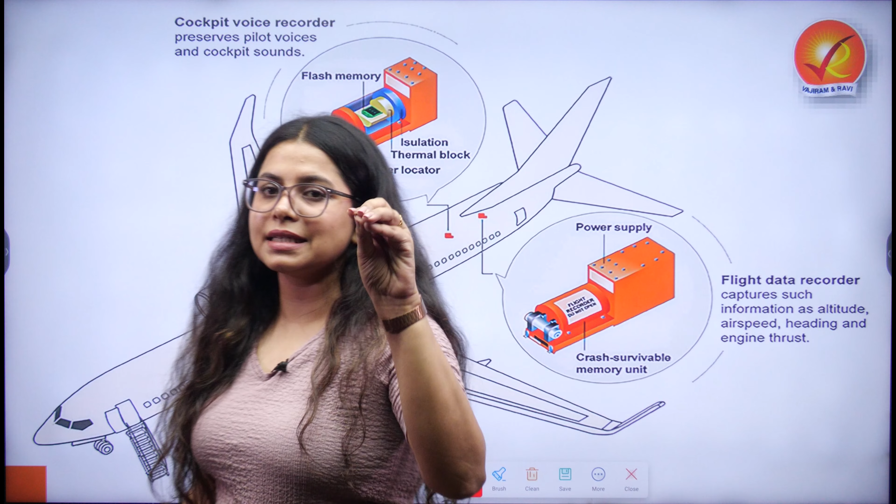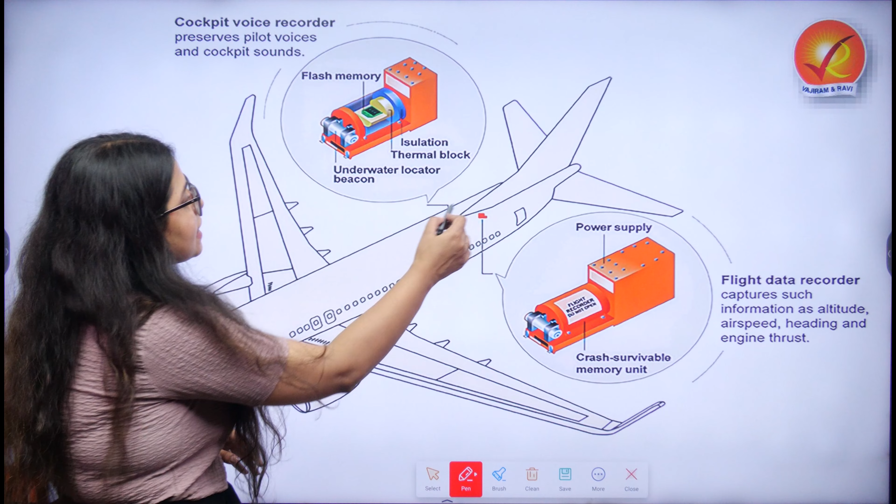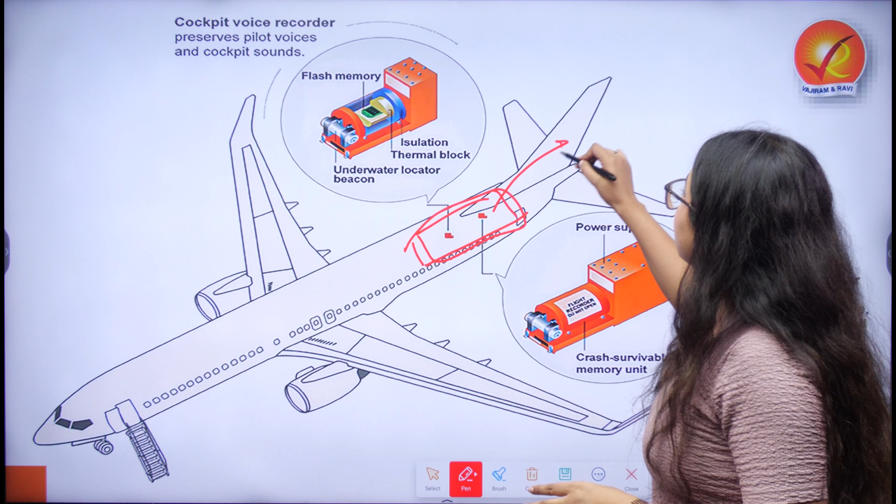Now that we have established the timeline, let us understand what exactly this black box is. Don't go by the name - the black box is rather orange in color, and it is placed in the tail of the airplane. Why? Because as per research and studies, this is where the minimum possibility of damage is seen. This is the place where it is kept.

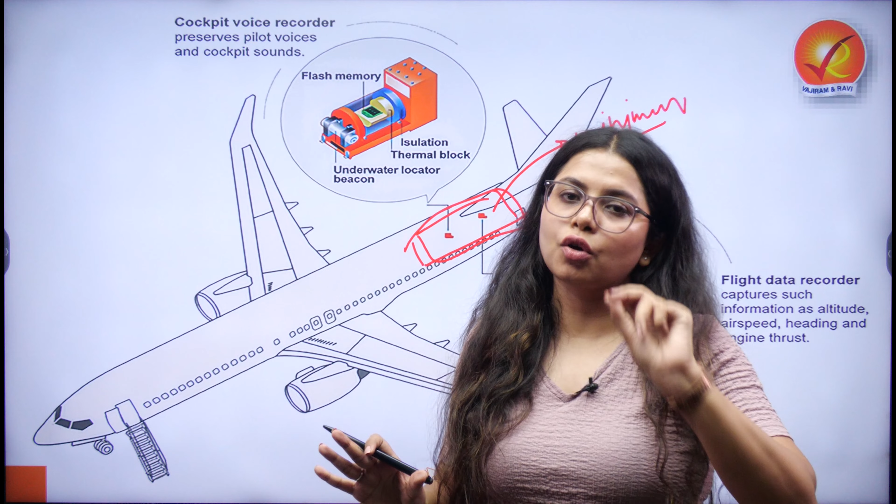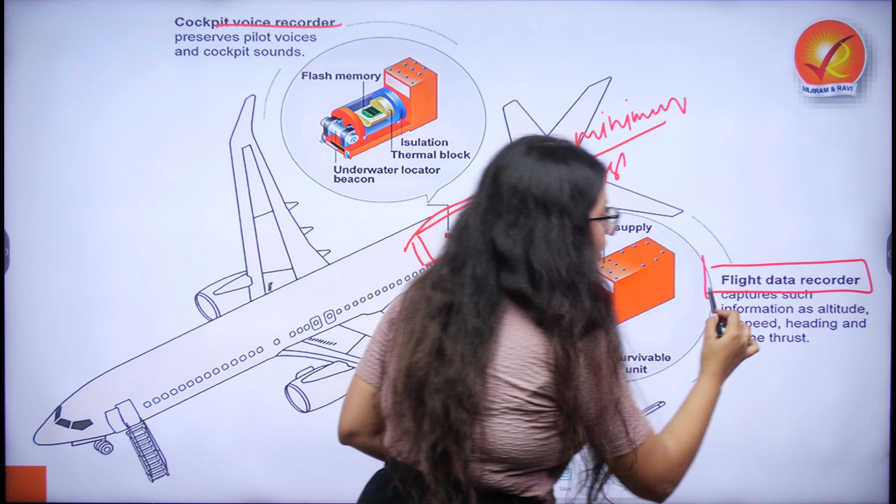Now the black box has two major components. The first component is the cockpit voice recorder. The other component we have is the flight data recorder. We'll move into more details to understand the exact purpose of both of these components.

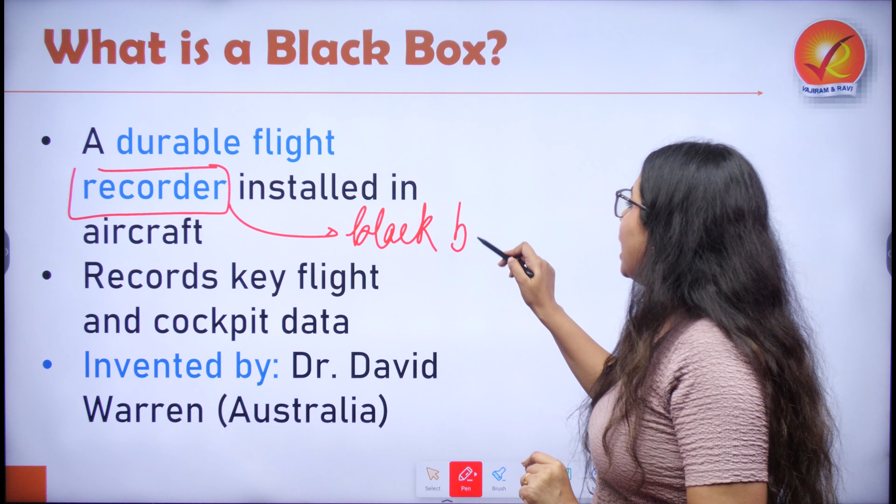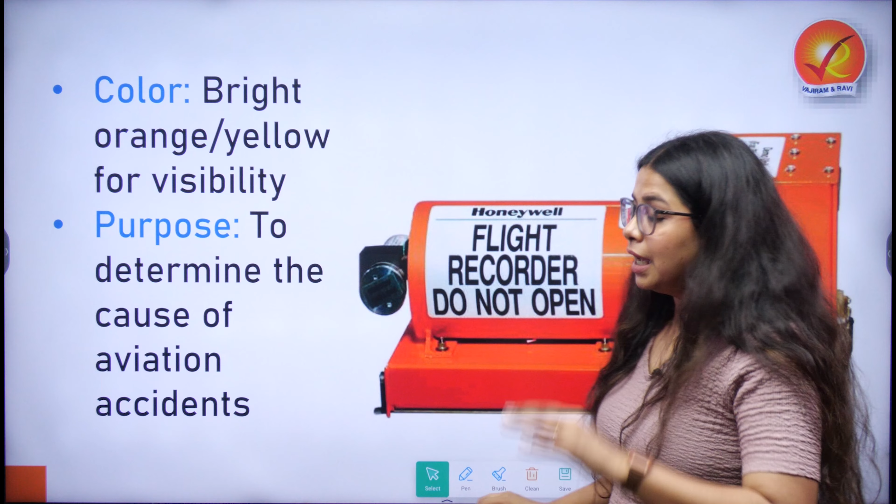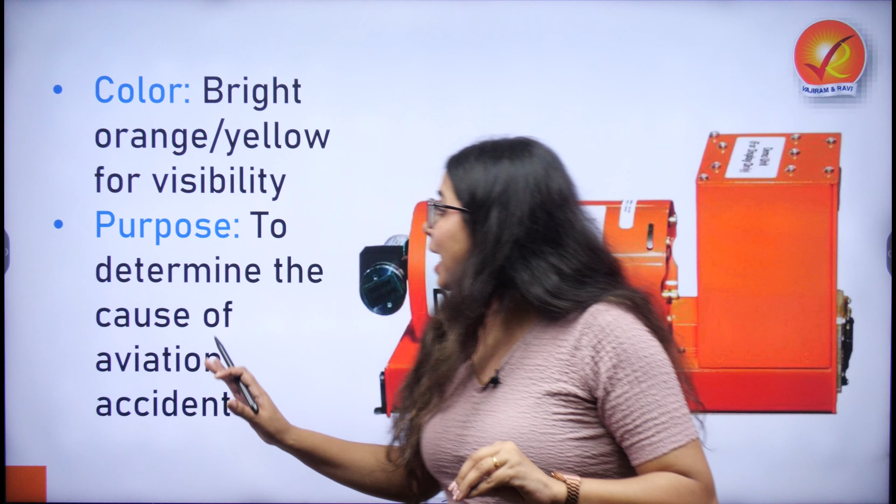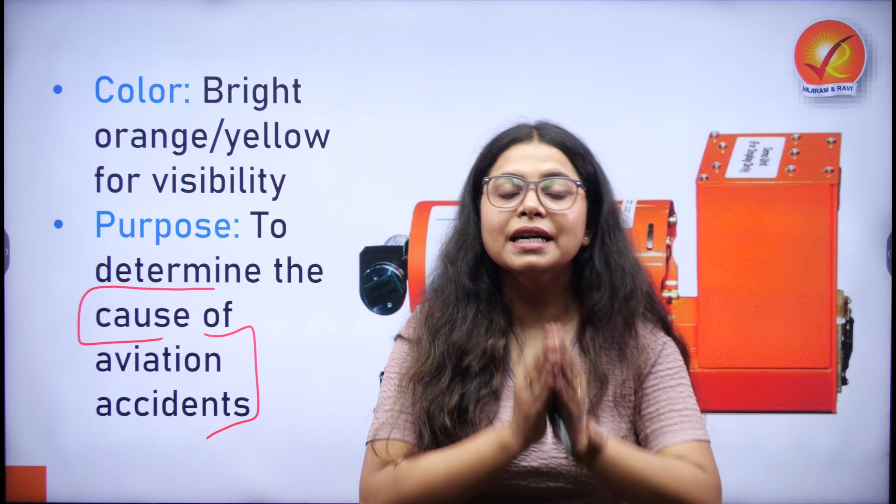But let us try to understand what exactly a black box is. Whenever we talk about a flight, a recorder is placed in that flight - that recorder is the black box we are referring to, and this recorder records all key flight and cockpit related data. It was invented by Dr. David Warren, and as mentioned before, it has two major components. Again, do not go by the name - the color of the black box is not black, it is rather orange. The purpose is only to understand the cause of aviation accidents, and it has been significant in understanding the reasons behind major air crashes or air accidents that have taken place. We'll look into a few examples by the end of this session.

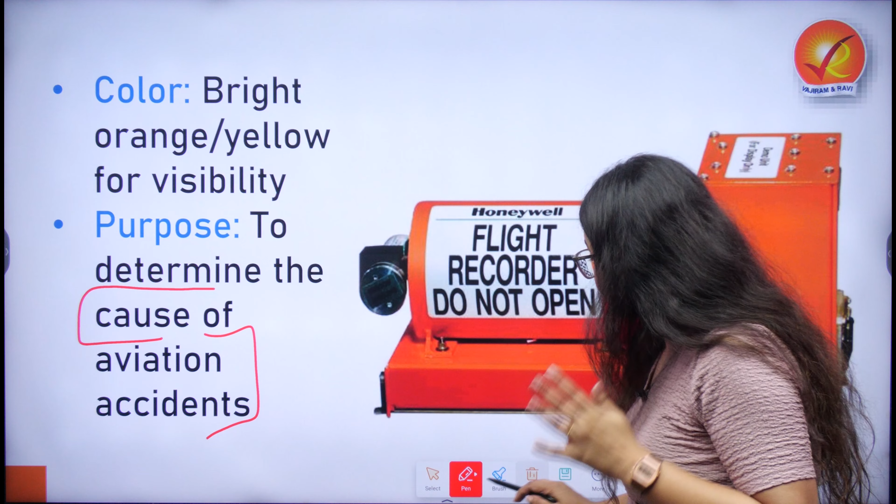Now that we have understood what a black box is - it is nothing but a recorder - what are its two components? The first component is the cockpit voice recorder, or CVR. It ensures there is a proper recording of data related to pilot conversations that have taken place, any alarms that have gone off during the flight, and the associated background sounds. The second part is for understanding flight data, which is the flight data recorder, also known as FDR.

It records all the data associated with altitude, airspeed, heading, acceleration, pitch and roll angles. So when we are trying to understand what exactly led to the crash or the accident, these two components become very important because they have all the data saved about what conversations happened between the pilots or what actually went wrong in the flight.

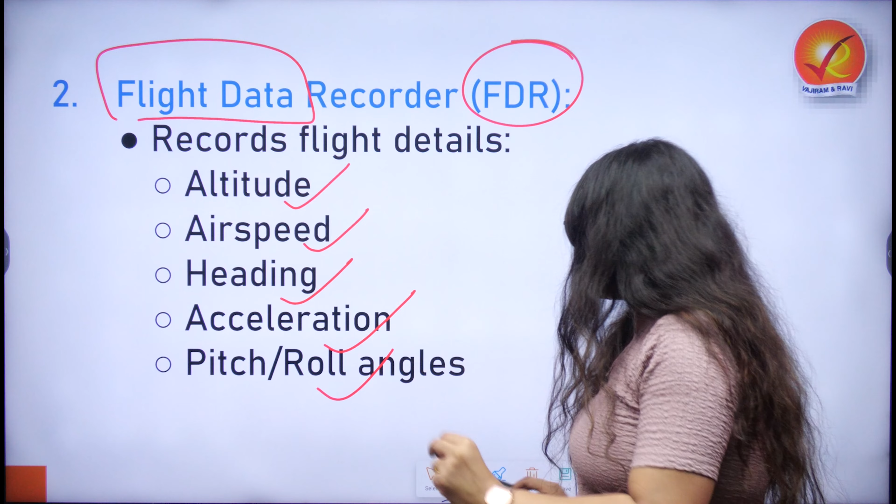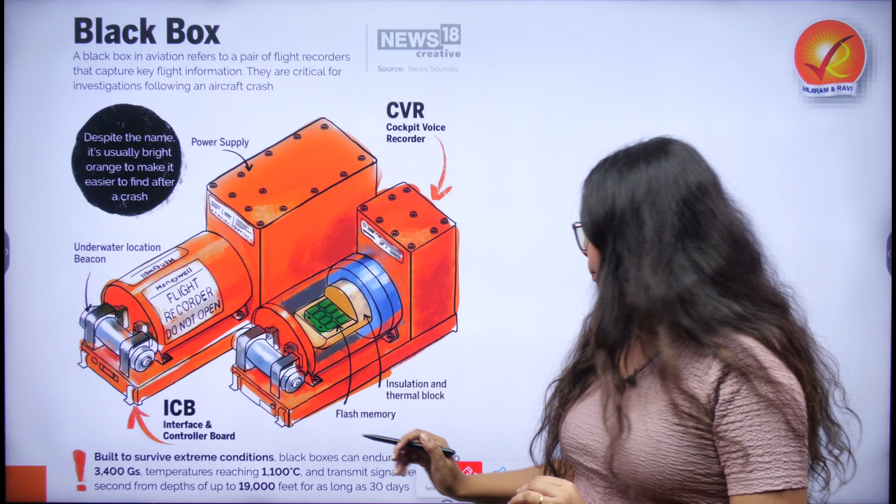Now you must have a question in your mind, even if this data exists, how it must have survived the crash. Black boxes are made such that they are able to survive such extreme conditions. So if we talk about both of these components, they are built to survive extreme conditions. What are such conditions? Let us look at these conditions.

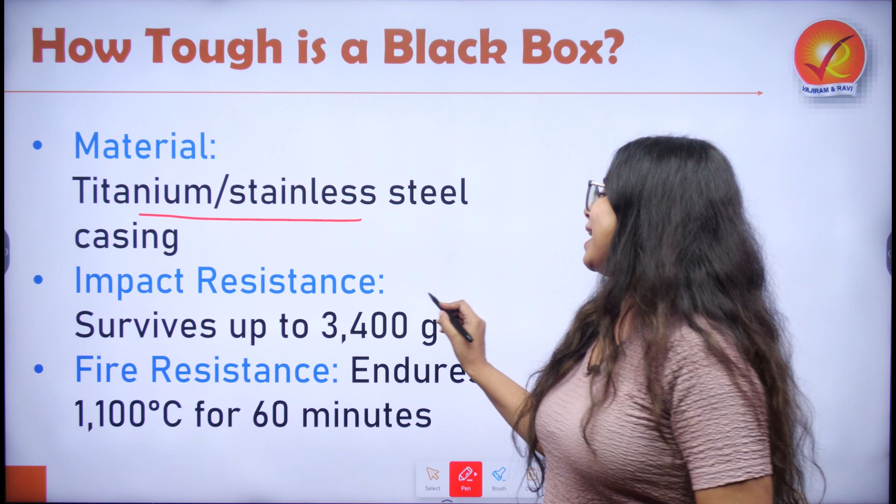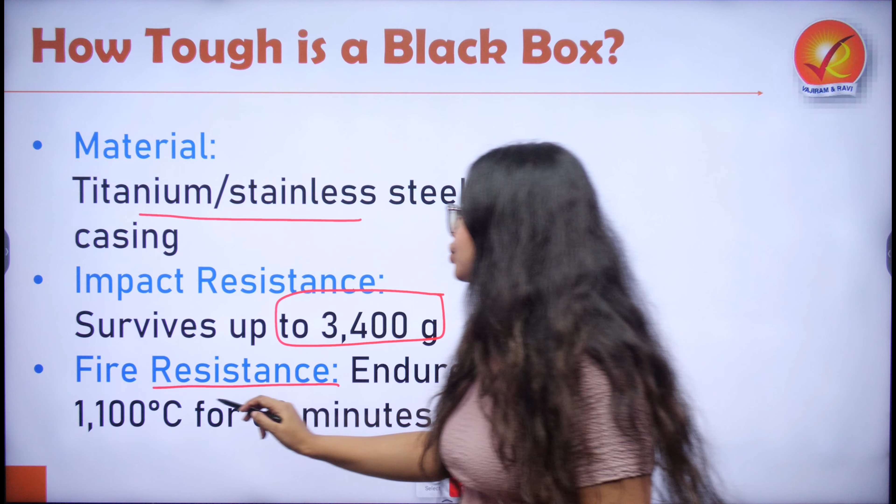The material is usually made of titanium and stainless steel casing so as to ensure they are able to survive impact resistance of up to 3400. Other than that, the fire resistance is usually 1100 degrees Celsius, that too up to 60 minutes.

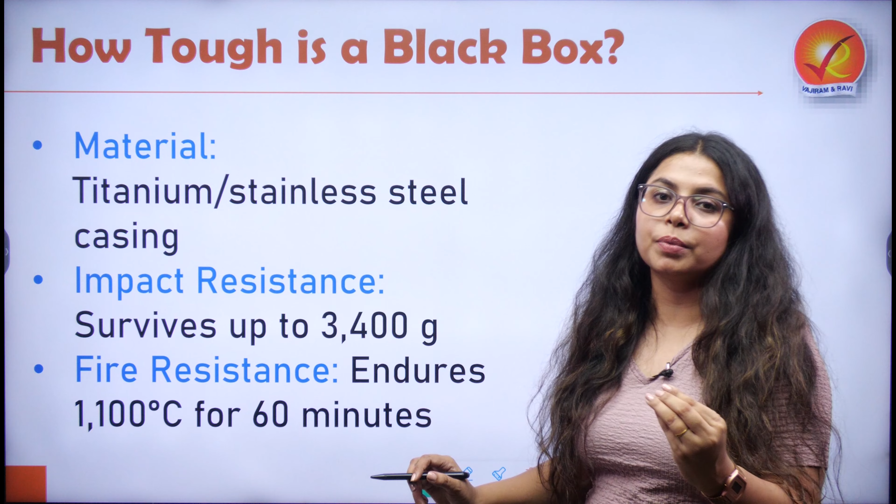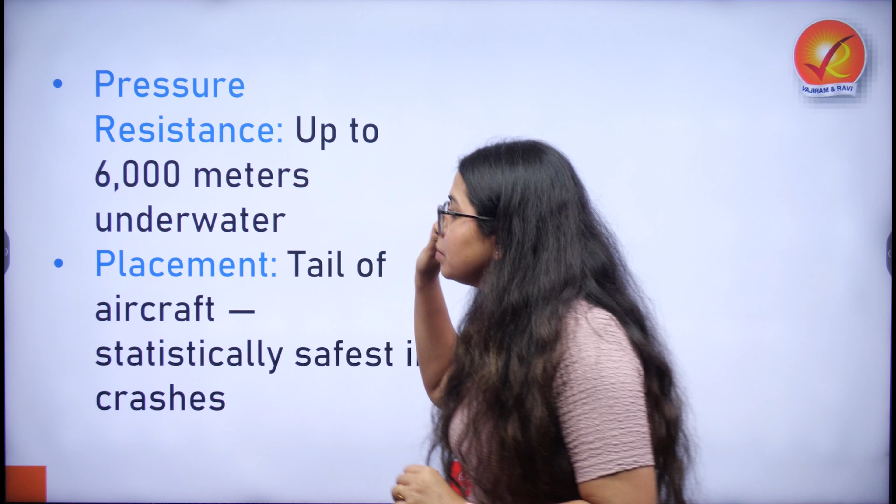So the casing is done to ensure the data present in the black box is preserved so that it serves its purpose of helping to understand the reason, the cause of the air accident. There is also pressure resistance of 6,000 meters. Even if the airplane crashes into a water body, it can resist up to 6,000 meters underwater of pressure.

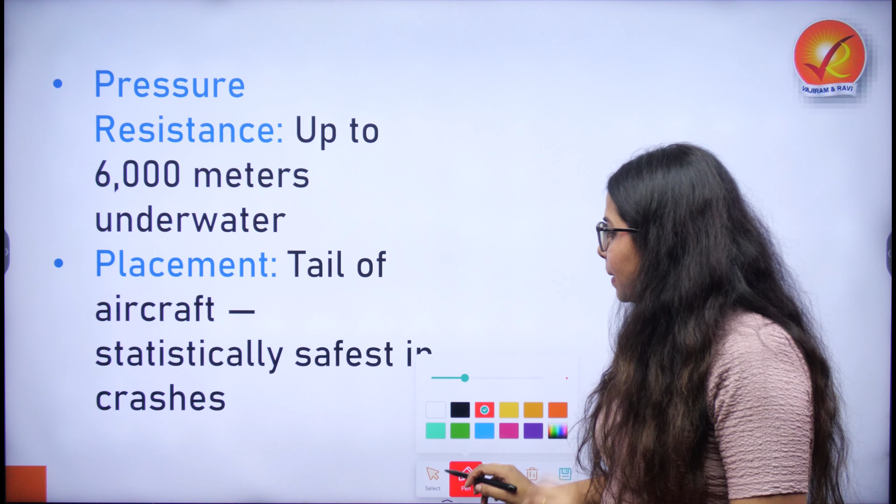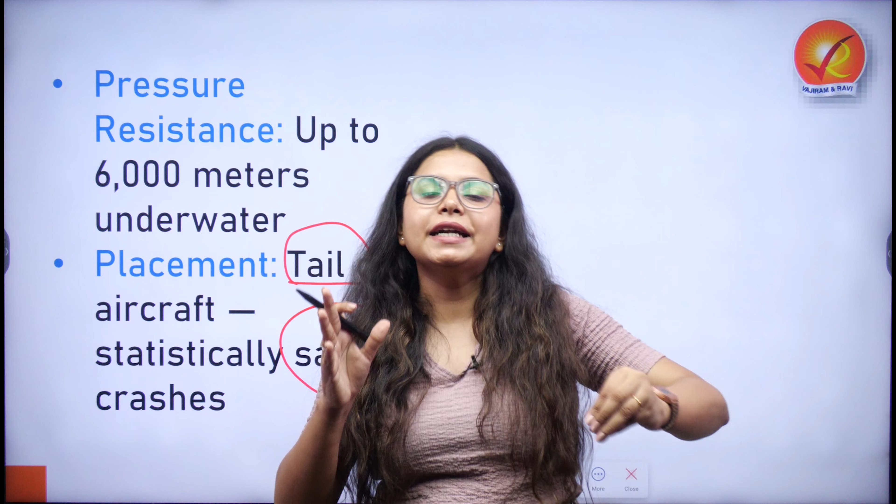And it is placed, as I have mentioned, in the tail of the aircraft because as per research and data, statistically it is the place which is safest, or which has the possibility of minimum damage during crashes.

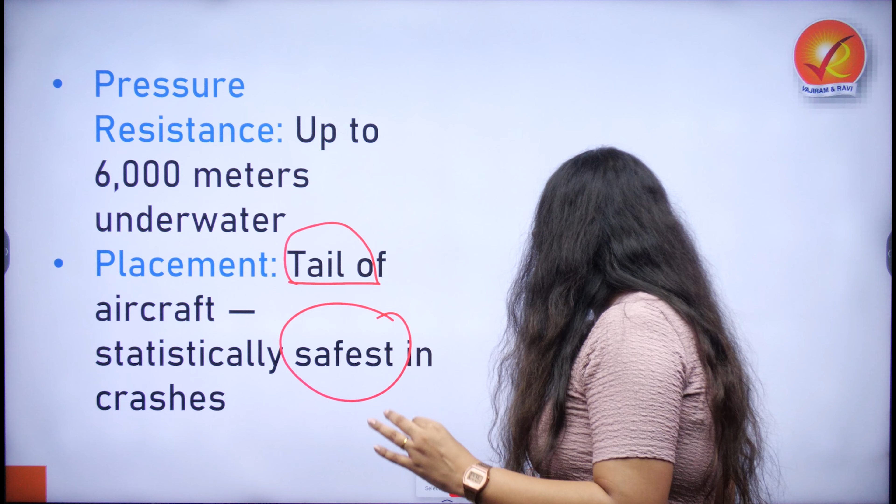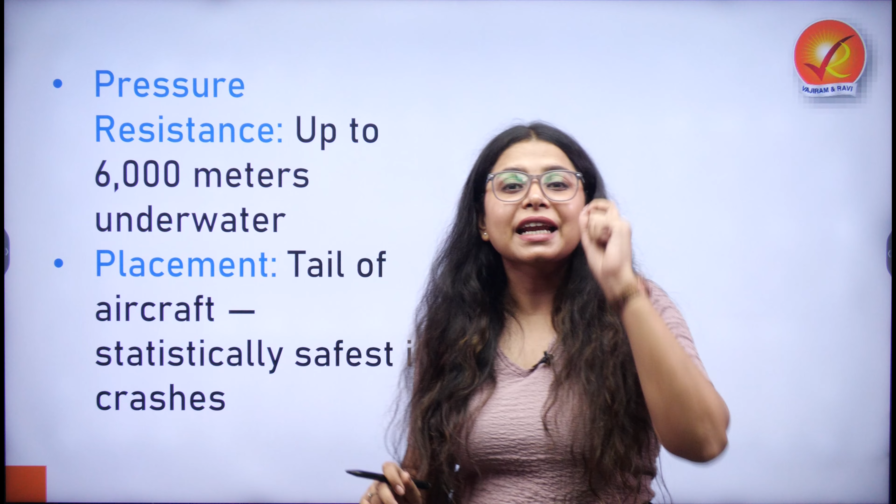Unfortunately, in this particular air crash, it took a while to discover the black box, and finally the black box has been found yesterday. Now that the black box has been found, it can help solve the mystery behind what actually went wrong, that the flight of Air India 171 crashed immediately after takeoff.

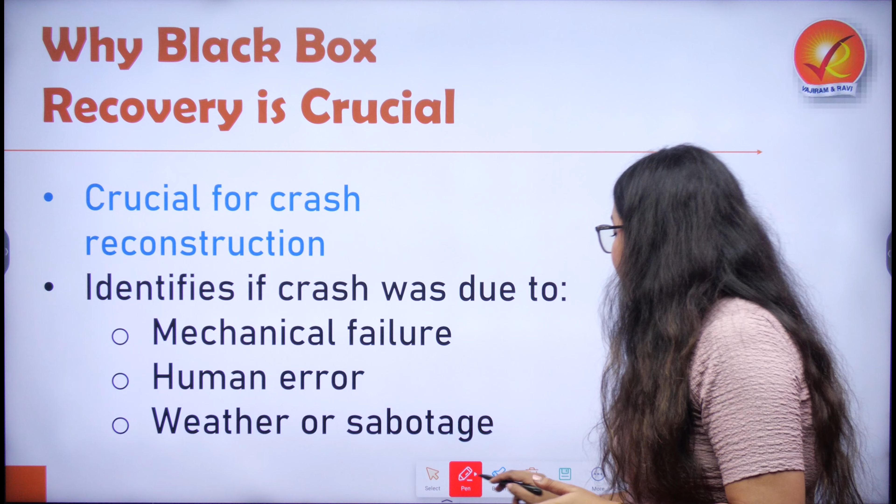Now this is what makes the recovery of the black box very crucial, that it helps in identifying if the crash was a mechanical failure, if it was a human error, or if it could be a weather or environmental related hazard. Now, once we have figured that out, it is responsible in the coming times to ensure that such future disasters are prevented, and if there is any liability, that can be figured out.

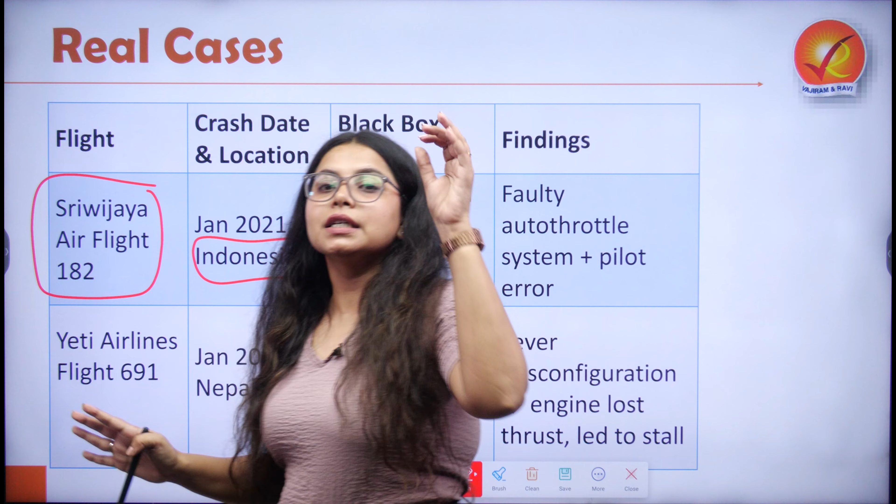Now we have established what exactly is a black box, and I am sure you understand its importance, and this importance has not just been seen in this particular scenario, but has rather been established in previous scenarios. For example, if we look at the Sriwijaya Air Flight 182 in 2021 in Indonesia, the black box was the reason we were able to understand that it had a faulty auto throttle, which is an important part, and there was pilot error also involved.

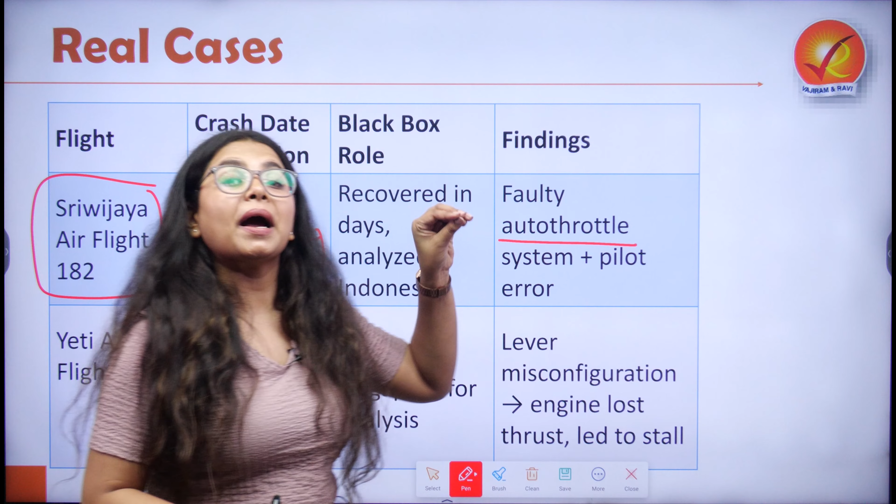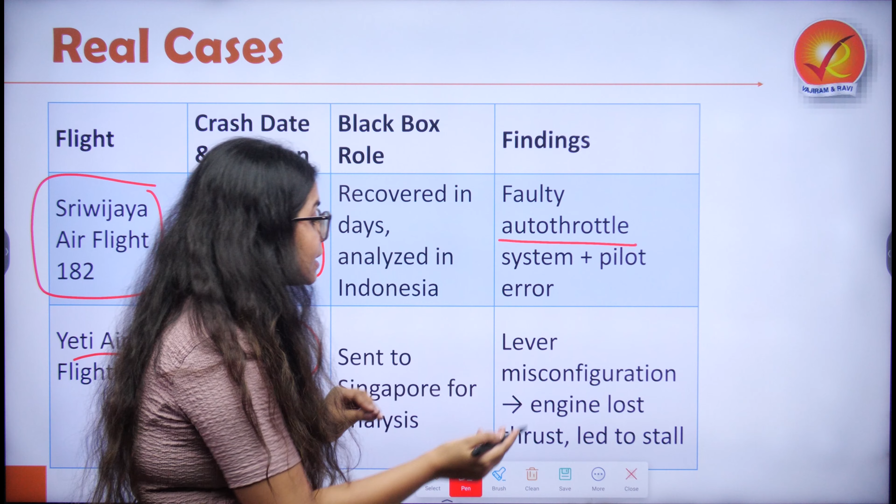Apart from that, if you look at a more recent incident, we have Yeti Airlines Flight 691, which was in 2023. It was sent to Singapore for analysis. The black box was sent, and that's when it was realized there was a lever misconfiguration, and that is why the engine lost thrust and had to be stalled.

There have been other scenarios as well. For example, the China Eastern flight we saw in 2022. We have the PIA flight which was in Pakistan in 2020, and one of the recent ones, Azerbaijan Airlines Embraer, that was in December 2024, where the black box had to be decoded by Brazil, and it is yet to be figured out what was the reason for the shoot down or technical failure.

These examples show us how the black box has helped in the past to understand what led to these tragedies. At least there was an answer, and hopefully we will be able to get some answers in this particular scenario as well. That was all from my side.